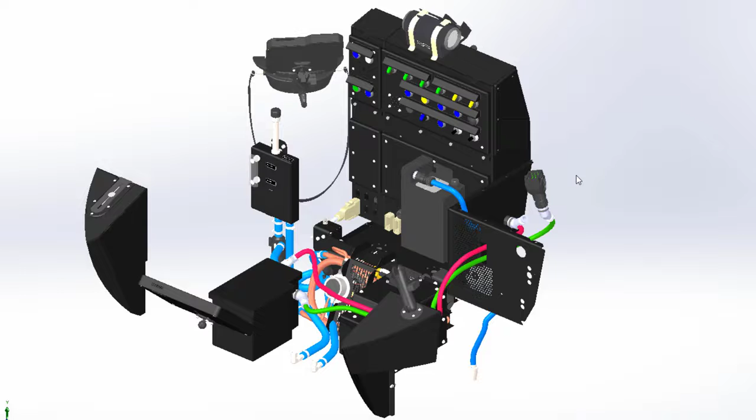When you go deeper into the beautiful unknown of the underwater world and rely on your power, oxygen, and navigation, electrical design plays a big role. In SOLIDWORKS, we bring multidiscipline engineering into one ecosystem. Creating electrical information for a SOLIDWORKS part does not need to be a long, drawn-out process.

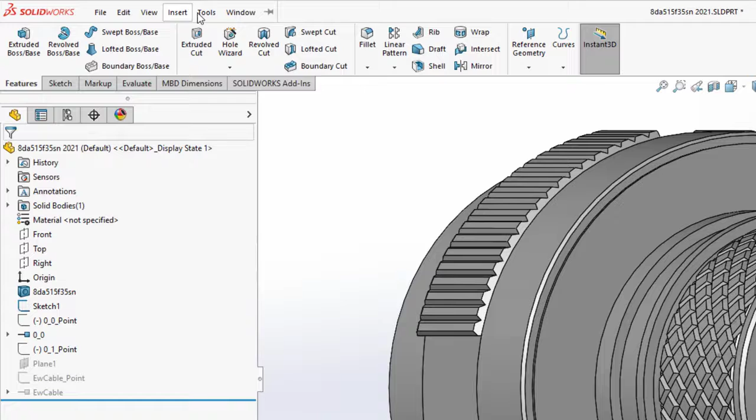Adding connection points in SOLIDWORKS became easier. They can be done inside SOLIDWORKS by going to Tools, SOLIDWORKS Electrical, where you can select Create CPoint from Manufacturer Part. In this dialog, it remembers the last manufacturer part that was used, or you can browse and select a different manufacturer part from an extensive library.

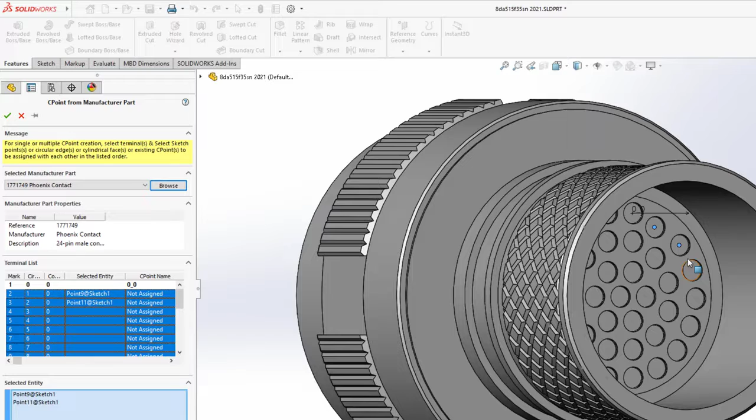The terminal list shows the list of connection points that need to be added. Selecting a point or an edge in SOLIDWORKS updates the table, and selecting OK will add these terminals to the part.

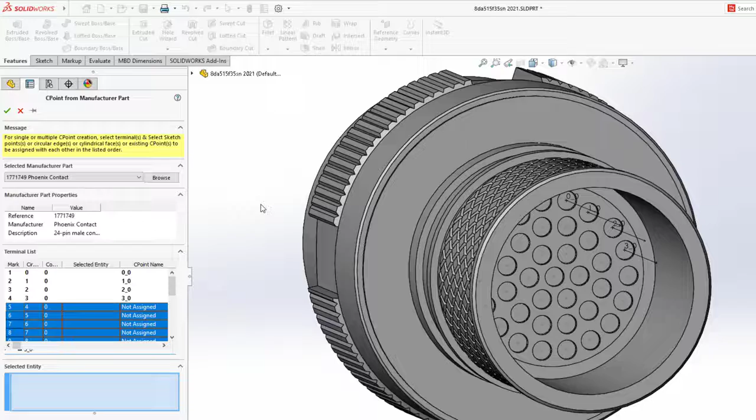Going back to Tools, SOLIDWORKS Electrical, Create CPoint from Manufacturer Part reveals what terminals already have been placed with the remaining list to do. The ability to select the point or an edge in SOLIDWORKS, to add the connection point with table updates, allows you to quickly create electrical components right in SOLIDWORKS. Less time creating parts and more time designing.

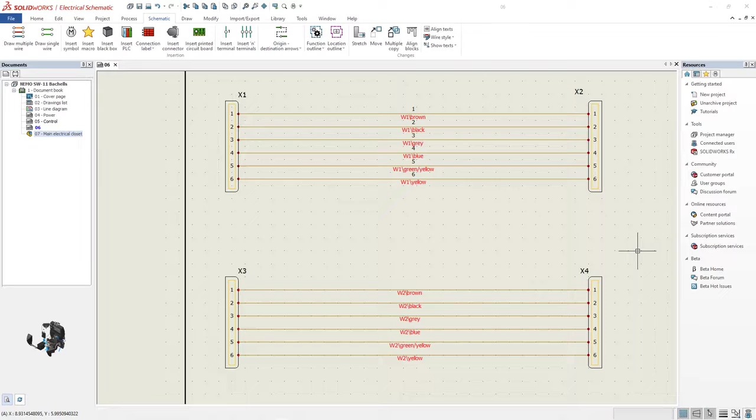How would you protect the junction between contacts and wires to eliminate electrical failures? Backshells are used, and SOLIDWORKS now supports them. Two harnesses from the battery to the control panel and external plug are created in SOLIDWORKS Electrical Schematic. In SOLIDWORKS, these two harnesses are routed. Now that the routes are in place, you can address the wires and contact protection.

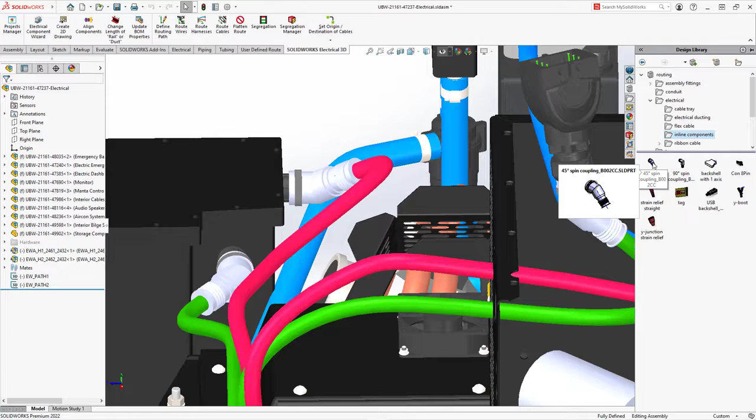Adding backshells to the connectors removes the stress between contacts and wires. Backshells are available in Design Library, Routing, Electrical, Inline Components. A 45-degree spin coupling was used and mated to the connectors. One more connector with a backshell will need an adjustment of the harness to go through the backshell.

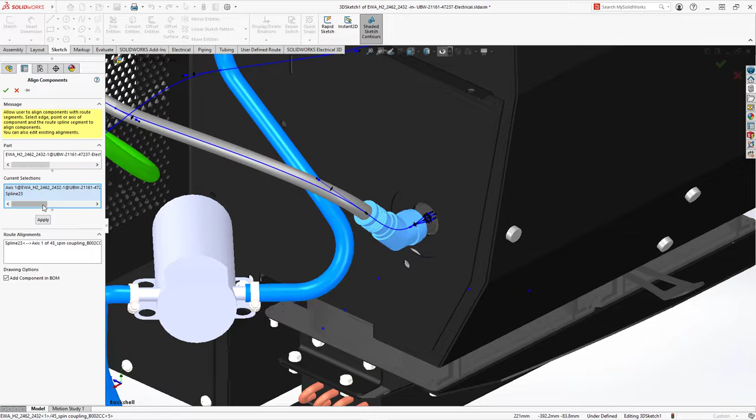Edit the harness that is in red and select the body of the backshell. From the right mouse button, choose Edit Route Alignment. Select the spline of the harness and then the axis of the backshell. Efficient use of backshells during design will protect the junction between contacts and wires, eliminating downstream manufacturing delays and costly redesigns.

Creating harness drawings and tables manually takes time and can be error-prone. Flatten Route in SOLIDWORKS automates this process and now supports backshells. Flattening this red harness will include backshells along with the harness and connectors in its 3D position, and will show them in appropriate locations.

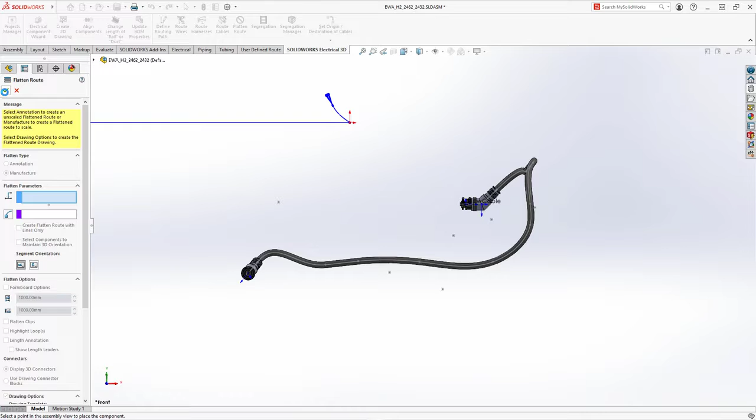In the Flatten Route dialog, choose what detail of documentation you will need to include, like manufacture, display 3D connectors, and checkmark for drawing options. Choosing OK does produce the harness drawing with connectors, backshells, tables, and callouts automatically, and saves time for engineers to tackle other technical challenges.

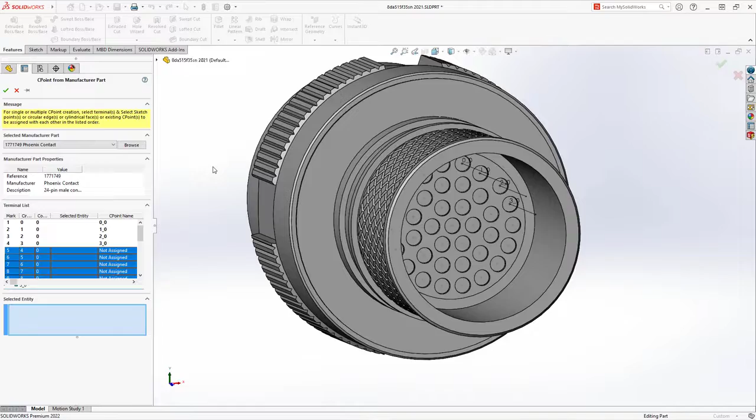The SOLIDWORKS ecosystem lets you quickly create electrical information for components, add and manipulate backshells for contact and wire protection, and create flattened harness drawings that include backshells.